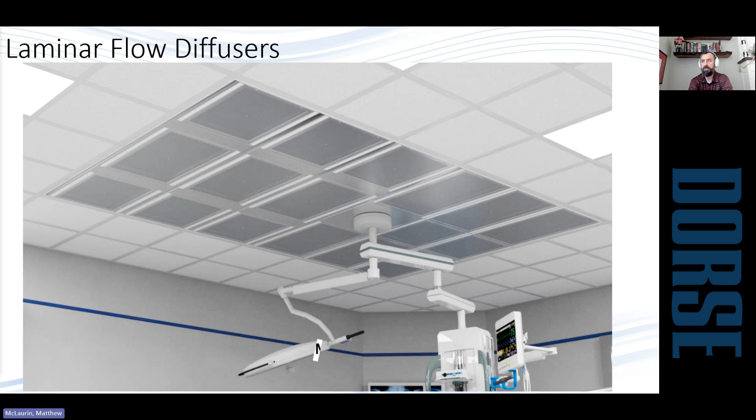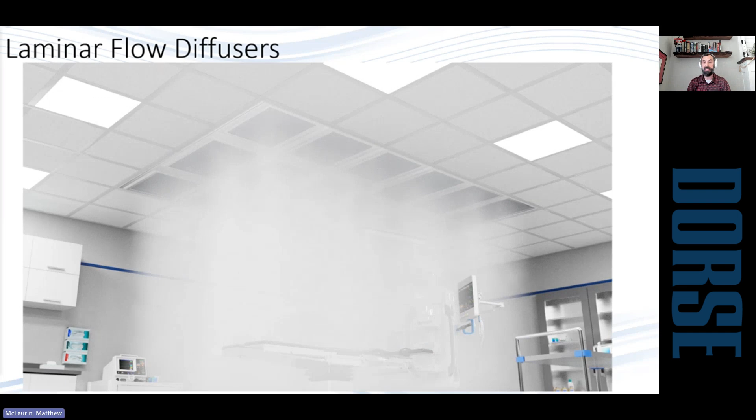You look here, we've got our HLC MPA, that's our modular plenum array system. Here you'll see the diffuser arrangement laid out all together. You see the airflow coming down into the room, nice and even and uniform. We're trying to minimize any mixing. And so Standard 170 has the requirement that calls out a Group E non-aspirating diffuser. So unidirectional flow down from the diffuser, minimum entrainment, and really where we're driving with that is no aspiration of room airflow into the flow.

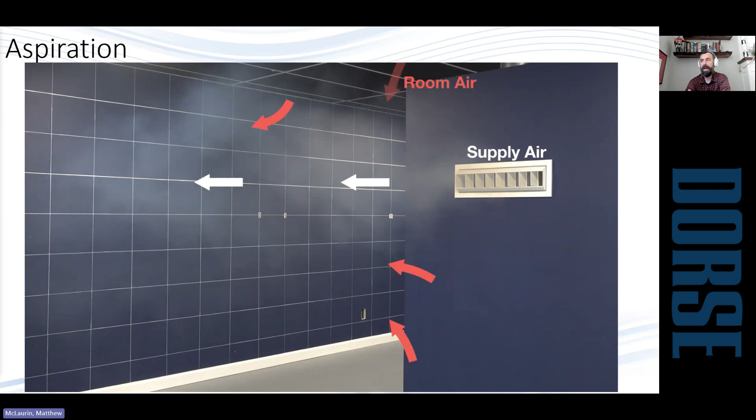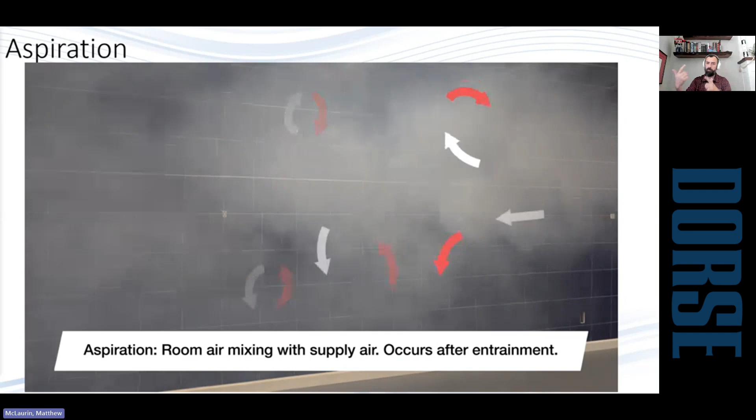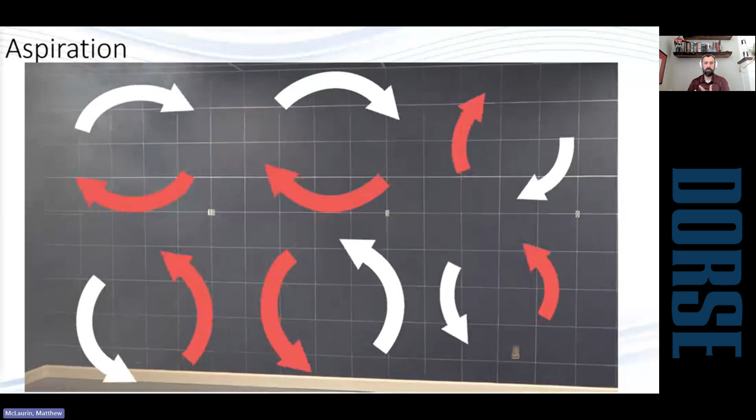So if we look at a quick animation of what aspiration is, you've got this room air motion that's being pulled along with that supply airflow. And then as it starts to move into the room, you see it really starting to mix into that flow, and it's one combined flow. That's what we're meaning when we're talking about aspiration. And that's your traditional type diffuser. What we're really trying to achieve is none of that. So no aspiration. So you're going to have that airflow coming down into the room very, very slowly.

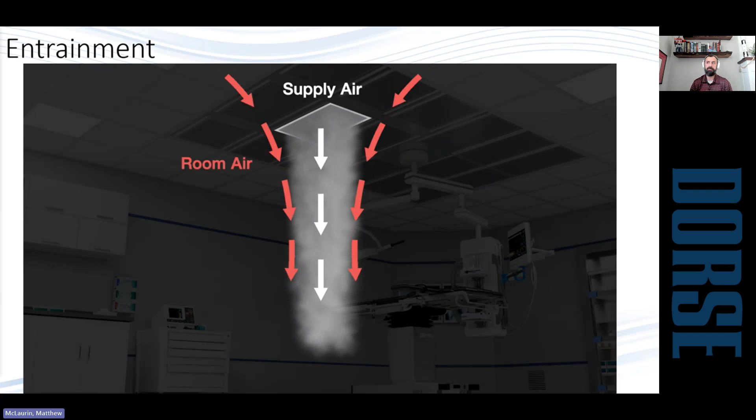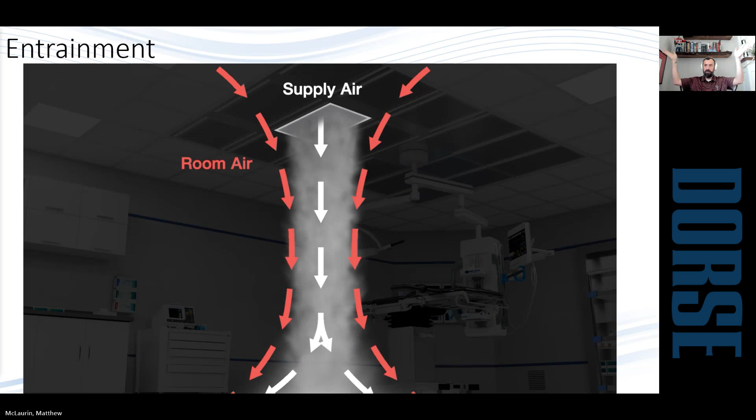What you will still have is entrainment, and that's just kind of part of the physics of the device. You have that fluid coming into the room. It's not mixing with that room air, but because of that velocity, there's friction with the fluid that's already in the room, and so it's pulled along the flow line. So there is going to be some minimal amount of entrainment with these diffusers.

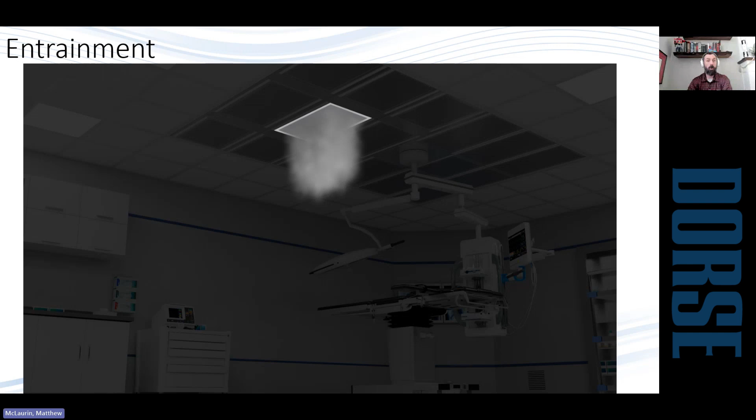And what we're going to try to do is minimize the surface area of that flow coming out of the diffuser, so that minimizes that border around the diffuser where that entrainment occurs. So the more uniform velocity we have across the face, the smaller the surface area of that flow, the lower the entrainment levels. So one space where we really talk about these getting used is protective environment rooms.

So here from the air distribution standpoint, you need a Group E non-aspirating diffuser with a terminal HEPA filter placed over the patient. So this is one of the secondary places where we see the requirement for the Group E non-aspirating diffusers. And this one specifically has a requirement for the terminal filter or terminal HEPA filter, so in the diffuser itself.

Part of where these requirements come from is from the filter manufacturers that help participate in Standard 170 and develop those codes. What they've presented to 170 is that downstream of what would have previously been referred to as filter bank 2 in Standard 170, so downstream of the coil, but still in the air handler for the most part, if you had filtration there, downstream of those filters you would still have additional growth that could get into these applications that may cause healthcare acquired infections in the operating room, surgical site infections.

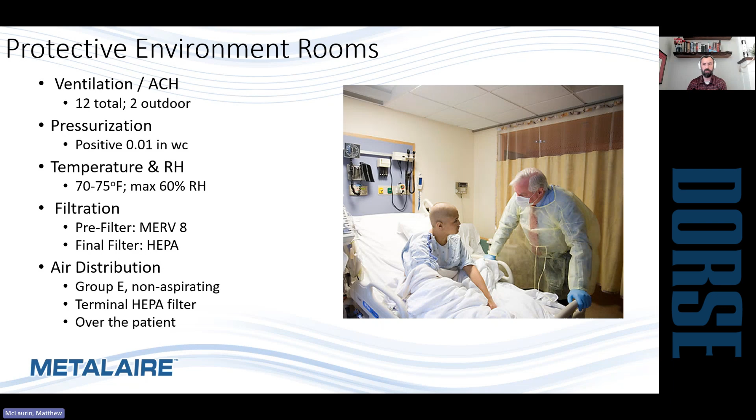And so in those critical applications, Standard 170 added this requirement to include the terminal HEPA filter. The other place where Standard 170 requires this is in operating rooms and Class 3 imaging rooms. So the primary supply diffuser array needs to be a Group E non-aspirating diffuser. And so for MetalAire, we have a couple of different options: a standard option, a multi-chamber option, and then our top of the line, the filtered option.

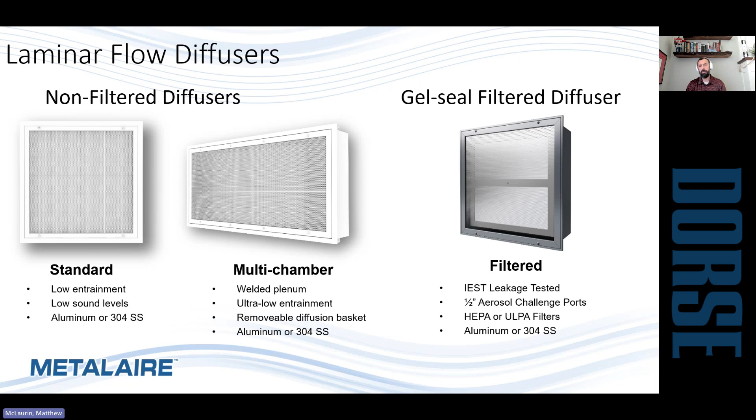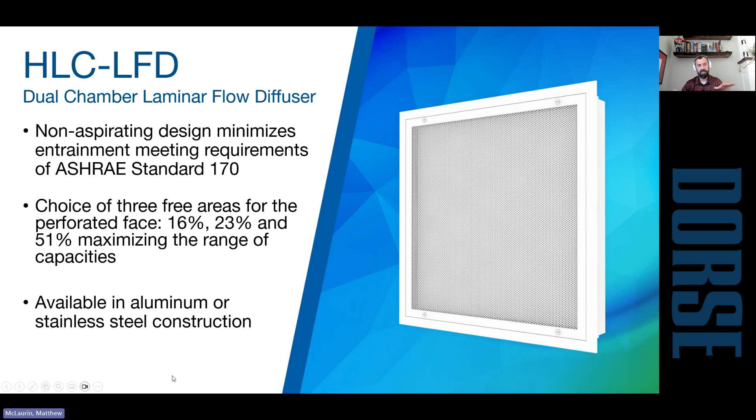So the standard option would be our HLC LFD. This comes in aluminum or stainless steel options. It meets the minimum requirements for Standard 170. So it's a non-aspirating design with a minimum amount of entrainment. You've got the perforated face on the front of the diffuser, and you can see through that there's another layer of perforated material back there, and that helps unify the airflow across the back of the diffuser face, so it's uniform when it comes into the room.

The HLC CLF that you see here is a step up from the HLC LFD. So instead of having that basic 2-chamber design, you can see there's a little bit of definition behind that perforated space. That's a chambered baffle that's got a solid panel above it with some cutouts that divert airflow into a multi-layer basket of perf with some baffling in there. That gives you super uniform flow across the face of the diffuser. That minimizes that surface area coming down into the room, and so minimizes the entrainment.

The HLC CLF used to be the primary choice for operating rooms, especially in high-risk applications. It gives you the best performance that you can without having the HEPA filtration. In most of these facilities where they're doing the higher risk surgery, they're doing HEPA filtration at the air handler already, which was beyond the minimum requirement.

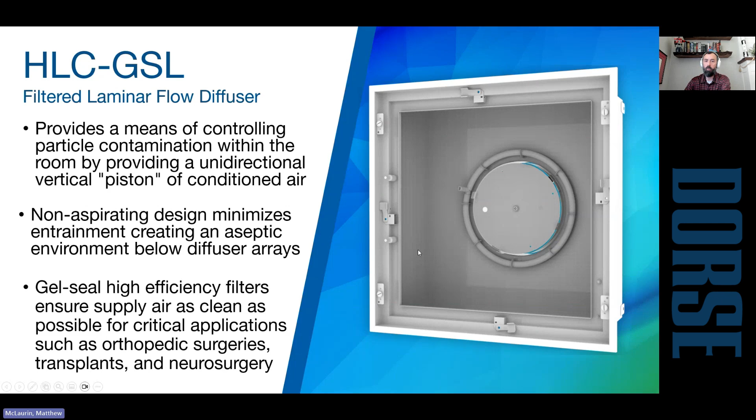And then we have options for including the aerosol test port. This is really important for compounding pharmacies. It's not as important in operating rooms. Typically, we're not seeing as many facilities doing filter leak testing in operating rooms, where it's required in compounding pharmacies. But this provides a means of adding in a port for injecting the aerosol upstream of the filter, and then a port for measuring that upstream concentration while you're doing your filter leakage test.

The other thing that we offer with this is a HEPA alert kit. That is either a 24-volt powered or 9-volt battery powered LED indicator that would illuminate the red LED inside the diffuser face, signaling to have the filter changed out.

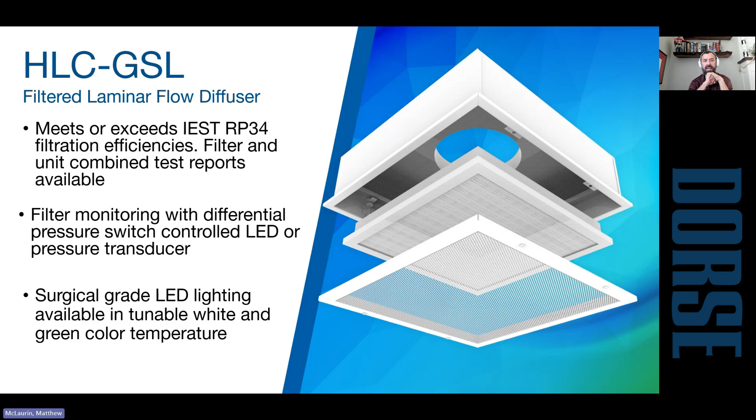That trips at 1 inch of pressure drop, which is pretty typical for most recommendations from filter manufacturers for when that change out's required. And it's just something that we always like to see on one diffuser in an operating room or compounding pharmacy room where they're doing that. You don't need them on all of them because they're not always going to load equally. And so just having one in the space usually is sufficient for that indication, and then all of them would get changed out at that point.

Moving on to operating room systems. So as I mentioned, for operating room class 3 imaging, there's a requirement within the primary supply diffusers to be group E non-aspirating. Once we move past that, you have additional supply for diffusers within a room that are group E. And so group E definition is pretty basic: ceiling or high sidewall mounted with a vertical air pattern. That's not a really great definition within standard 170 because that could open this up to a lot of other options. What we're really discussing in this is a surgical air curtain, like you see here.

This is our Paraflow system. We don't really see this much anymore. The primary location we see these in the US are VA facilities where the air curtain system is still the base for their ORs, but we'll pretty much make an exception for anything that follows standard 170. And so most of the VA facilities we've done recently, those are using your standard diffuser layout with coverage over the table plus the 12 inches.

In the air curtain, the energy costs and the coordination with it provides a little bit of a challenge, but we still do offer those. We do about 25 to 50 operating rooms a year with the surgical air curtains. Like I said, most of them are VA facilities or sold into Central and Latin America.

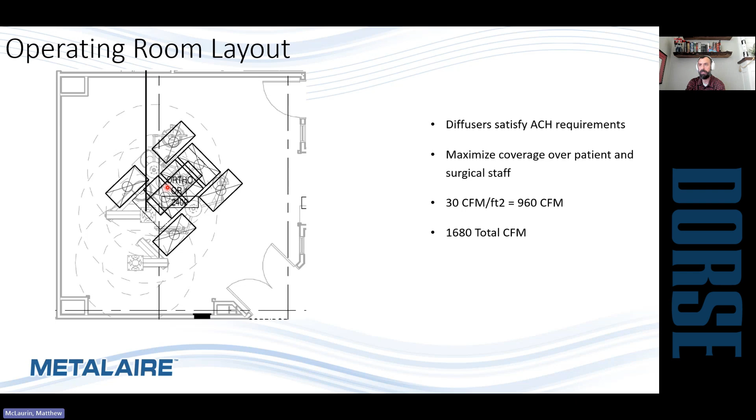So instead of having an entire array that is non-aspirating, the individual diffusers themselves are, but the array as a whole is aspirating, and we want to try and prevent that as much as possible. And so to help with that and help with ceiling coordination, like I said, the FGI guidelines added in what's called a central diffuser array.

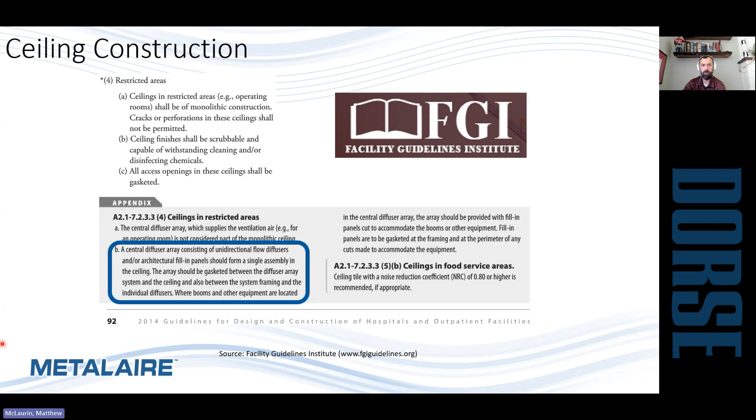And pretty much what that is is a gasketed grid system that allows you to have individual diffusers, but mounted much more closely together. So if you look at that with an integrated ceiling system there on the left, you've got all the diffusers pulled together, grouped nice and tightly together. Now, instead of 6 to 8 inches between the individual diffusers where the airflow is coming into the room, now that's down to about 1.5 inches, which is the width of the grid.

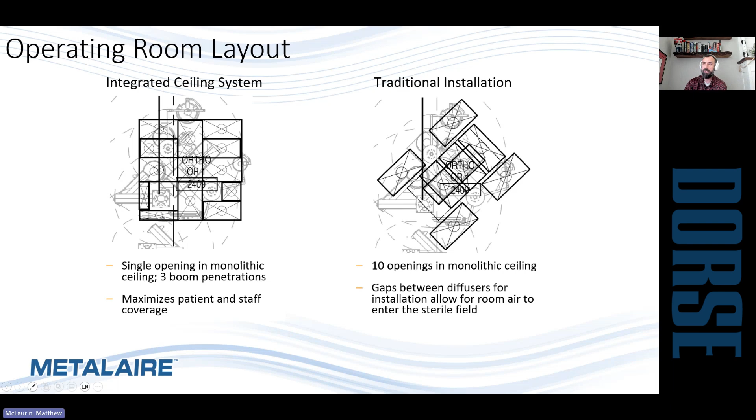And so all of that room air that would be pulled along, that's been prevented by pulling those diffusers much closer together. And as you can also see, now we've got those grouped where this perimeter for the diffuser array is significantly smaller than what you would have for the perimeter all the way around on the traditional installation. And so the entrainment that's associated with it is also going to be reduced significantly as well. So to accommodate this, we have what's called our HLC-HCG. So that's our heavy duty ceiling grid.

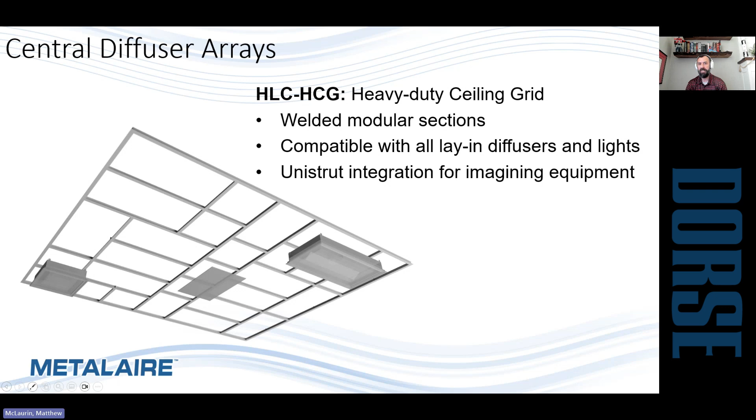We offer this in both aluminum and stainless steel construction, welded modular sections, so up to 4 foot by 6 foot sections that will ship individually, which get bolted together on site, raised up into the ceiling, into that single opening that's cut out. And then the individual diffusers, lights, and blank-off panels can drop into those. We can also do unistrut integration with that for imaging rooms, cath labs, EP labs. But that is a real challenge.

And so one of the things that we found that helps simplify that, especially with the really tight ceiling space, is going to a modular plenum system. So this is our HLC MPA, a modular plenum array that you saw with the smoke animation earlier. Common plenum, we integrate the unistrut to support the ceiling-level equipment. With that, all of this is then hung from structure; the booms and equipment would still be mounted to other structural steel. But we do integrate LED lighting, so it ties everything together really nicely.

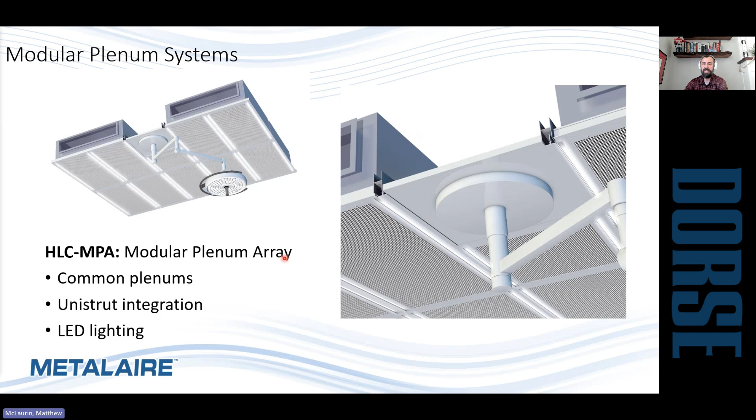One of the things with the LED lighting that we do specifically to help with coordination is, by default, our standard configuration is a tunable color configuration on the lighting. So anywhere from 2700K up to 6500K color temperature. 0 to 10 volt dimming on all of those, dim to 0.1%, so dim to dark effectively, throughout the entire color temperature range. The color rendering index for that LED lighting is at least 90. Once you get above 4000 Kelvin, it's 95 plus.

And so that's really critical for color rendering in the space, especially with it being a surgical site. The way that LED lighting affects the way we see: at lower levels of that, colors aren't as crisp and clear as they should be under natural lighting. And so that's one of the things that we try to make sure we have with all of those, 95 plus.

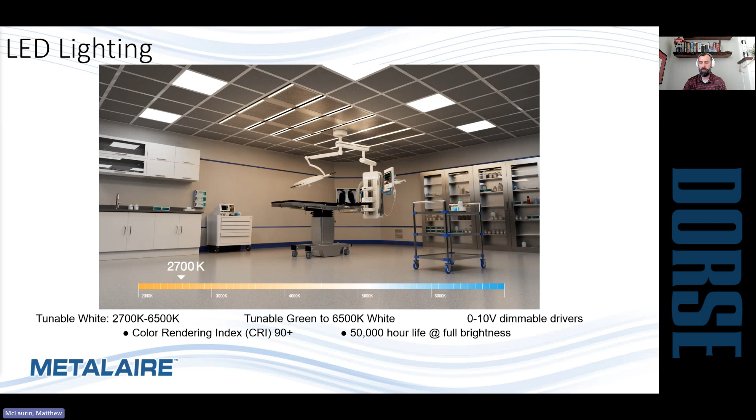So one of the other unique things that we do is we can vary that lighting not only in the color temperature, from different colors of white, but we can go from that white to green lighting. The green lighting is really important for those imaging spaces. Green lighting doesn't wash out the LCD and LED monitors that you have in those spaces. And so you can keep the lighting at full brightness in the room without degrading the imaging quality that they're seeing on those screens.

And then you also have improved red object visibility. So blood, red things show up almost black under green lighting and have a really high contrast to anything of other color under the green lighting. So stuff stands out really, really boldly when they're in there trying to close people up.

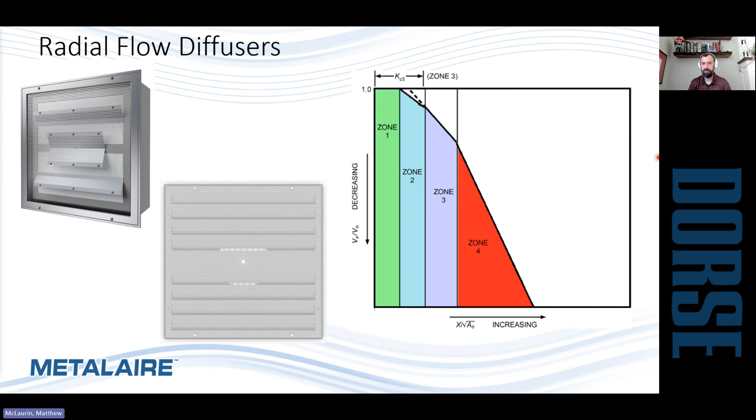So this scale would extend exponentially because with those you're wanting to get that airflow into the room and mix the space. Well, with these diffusers, we're trying to get as much volume into the space with as little disruption as possible. So if we look at that, here we have one of our HLC FFRs. This is our flat face radial diffuser.

If we look at another installation, you can see here, now we've got ceiling tiles removed adjacent to the diffuser, showing the ceiling independence of this product. So this is something that we've seen more and more requests and questions about on our radial pattern diffusers: if our throw is ceiling independent.

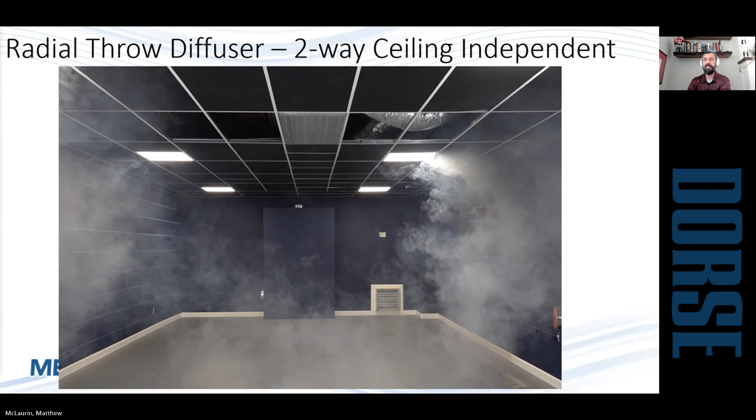It is. We went and developed this product specifically to get that horizontal ceiling independence with the throw pattern, because we saw the need for this in lab applications where more and more people are going to radial throw diffusers with exposed ceiling applications in those labs, that more industrial look, and without the ceiling, other products will just kind of dump down into the space, and you'll have those higher velocities that aren't really intended.

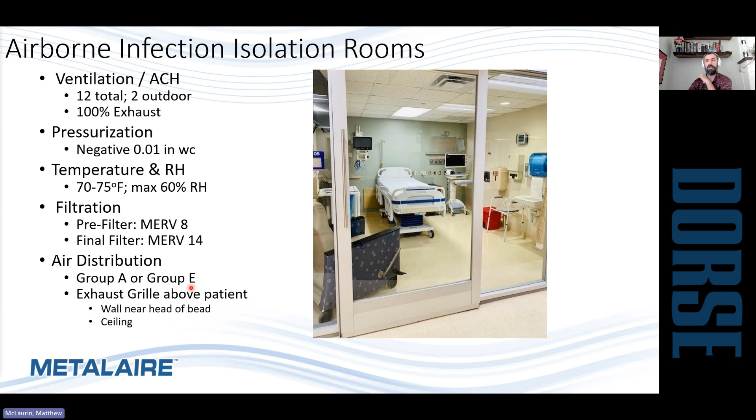The other really useful application for the radial flow diffusers is in airborne infection isolation rooms. For the air distribution, you need a group A or group E diffuser. So that's either ceiling or high-sidewall style wall mounted; with the vertical throw, that's group E. With a horizontal throw, it's going to be group A. And so what we want to do in this application is create a one-pass system of airflow coming into the room, being pushed towards the exhaust grilles on the side of the headboard, as close to the headboard as you can.

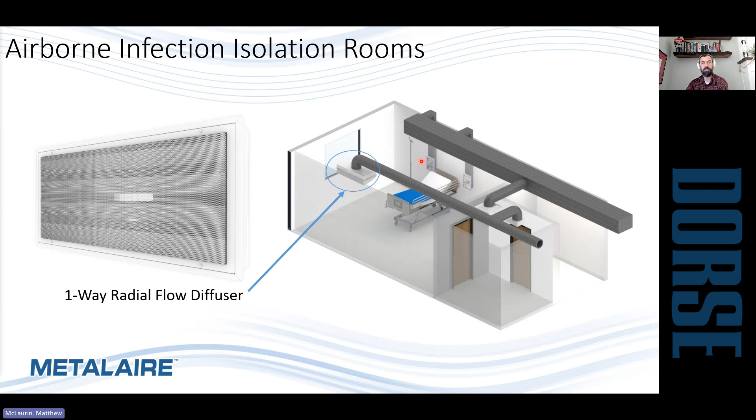And so that's where the throw pattern on the one-way diffuser is really awesome, because you get that nice 45-degree that's going to push all this air motion towards the bed. You'll have that constant motion pushing towards the exhaust, trying to capture anything that's coming off the patient in those applications.

Right. So moving on to fan filter diffuser products. Fan filter diffusers are relatively simple and are more or less exactly what they seem. I mean, it's a fan and a filter incorporated into the diffuser. So one of the things that we do for our product is, by default, all of these are EC motors. So they can switch from constant airflow to constant speed. That provides some benefits in the field.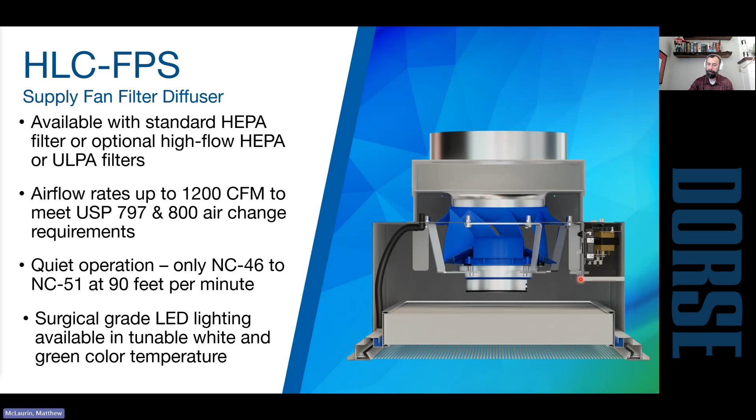One of the cool things that we do on the HLC FPR or the HLC FPS, you can see in this case, we've got the LED lighting integrated into these. That's really an option that we see being applied in compounding pharmacies, especially in the USP 800 spaces, trying to minimize the volume of airflow required to meet the air changes. So if you're able to incorporate the lighting into the fan filter diffuser, you're able to take a chunk, either 2 foot of volume throughout the room or 4 foot, depending on the orientation, and shrink that space size because you don't have to have the light and the fan filter in 2 separate spaces.

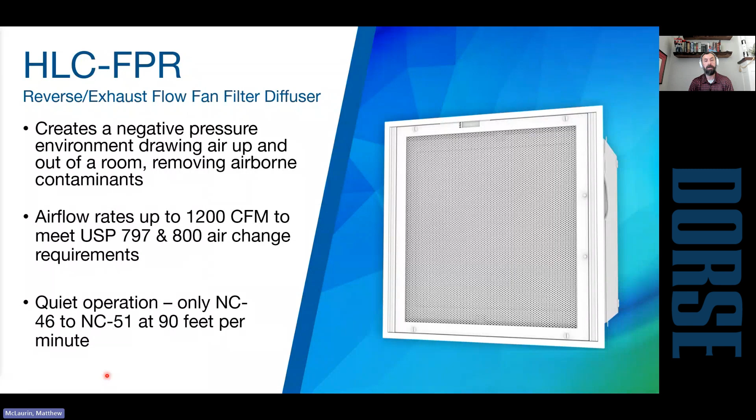Okay. That kind of brings me to a conclusion on products and overview. We got any other questions that came in throughout? I don't see any other questions here. So

we'll give it a few minutes. Is there anything else you'd like our customers to kind of fully know about the offering? Right, the MetalAire by Greenheck branding is a little new in our market. You know, some people who lived or worked on the East Coast might be more familiar with the MetalAire brand. So just touching back on that real quick, Greenheck acquired the MetalAire brand several years ago, and at the time invested in not only the production but also the engineering and innovation behind it, and brought in quality people who are technical experts like Matthew.

So in our market, we're going to be calling it MetalAire by Greenheck. Feel free to put MetalAire in your spec or Greenheck in your spec or MetalAire by Greenheck. That's the way to ensure that we can provide products on your job. So, yeah, Matt, anything else you'd like our customers to know about this product offering and everything you can do?

Yeah, so going back to the OR systems is probably the best one to start out. We have the expertise to help you from the very beginning or at any stage during your project. Right now I'm working on a project up in the Northeast with one of our reps up there, Herman. They've got an old Burlington coat factory, an old retail facility that they're changing into a day surgery facility. They came to us with, here's the space size, here's what we've got to work with. We need to comply with 170. What can you do for us?